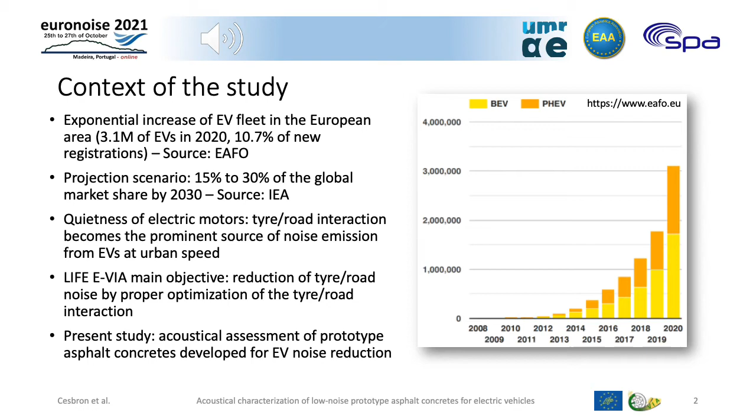Due to the quietness of electric motors, tire road noise is nowadays the prominent source of noise emission from electric vehicles at urban speed. Therefore, the aim of the LIFE E-VIA project is the reduction of tire road noise by proper optimization of tire road interaction. The aim of the present study is the acoustical assessment of prototype asphalt concretes which were developed for electric vehicle noise reduction within the project.

The development of the low-noise asphalt concrete for electric vehicles was divided into three main steps. It followed a holistic optimization which was developed by University of Reggio Calabria. In the first step, up to 150 asphalt concrete mixtures were analyzed by the University of Reggio Calabria, and 9 mixtures were preliminarily designed and tested in laboratory.

Based on these preliminary results, 2 asphalt concrete mixes were selected for prototype construction in France, in Nantes, on a reference test track at Université Gustave Eiffel. Finally, the last step is the construction of a test section in a pilot area in Florence, in Italy, based on the best mixture tested in Nantes.

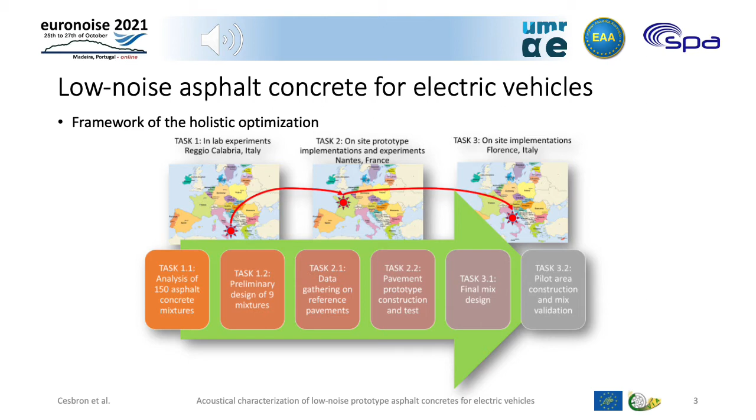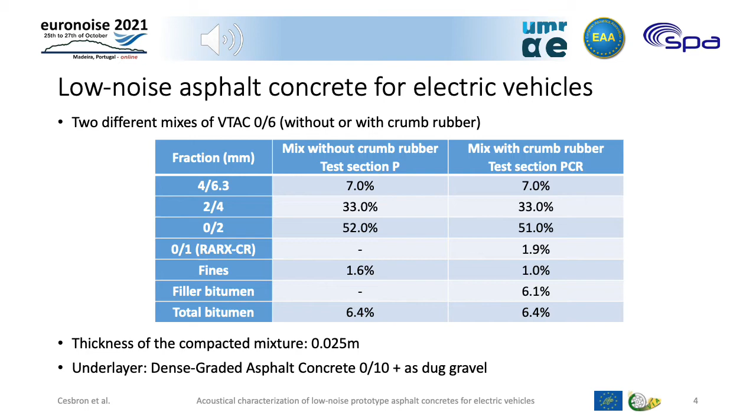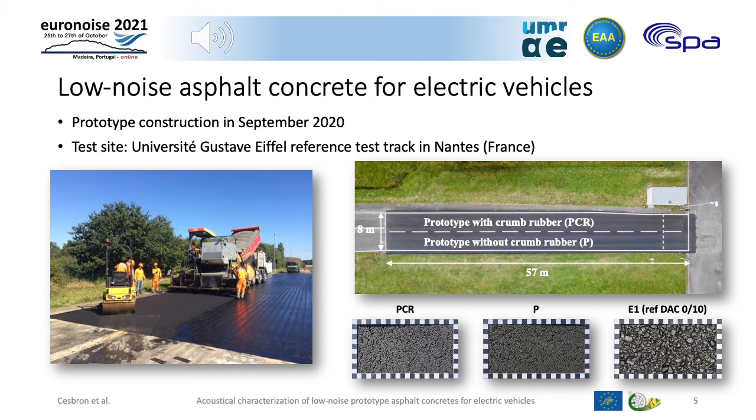At the bottom of the slide you can compare the final state of the road surface for test section PCR and P in a frame of 20 cm by 10 cm. You can compare to test section E1, which is the reference within this study and is a dense asphalt concrete 0/10.

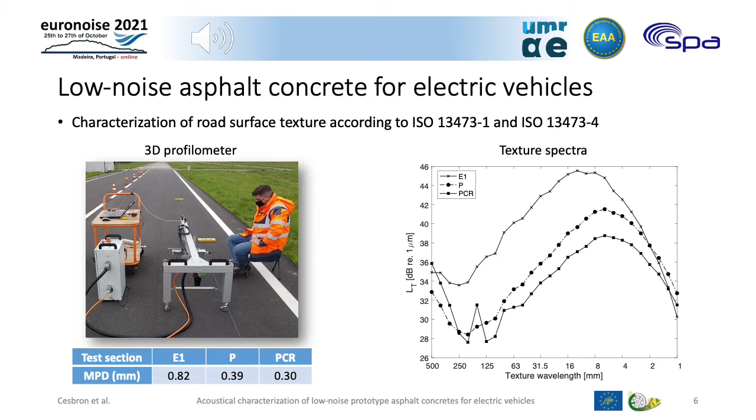On the right hand side of the slide you can see the texture spectra for the 3 test sections. As you can see, the texture levels of section P are up to 3 dB higher than those of section PCR at wavelengths lower than 125 mm, with an opposite situation at wavelengths greater than 250 mm. Texture levels of both prototype test sections are much lower than the reference E1, especially at wavelengths higher than 16 mm, for which a difference of about 6 to 9 dB is observed, respectively, for P and PCR.

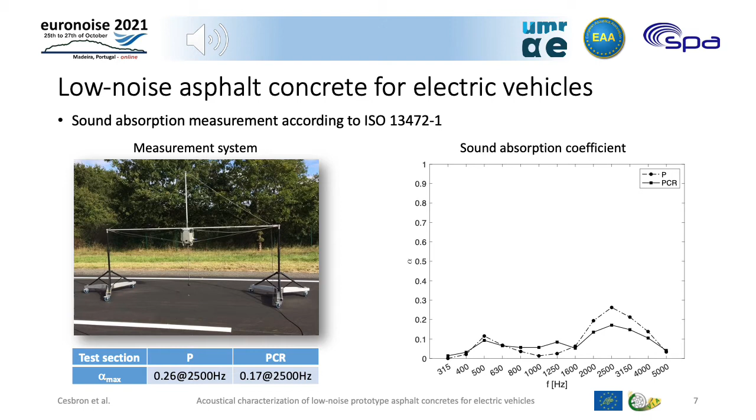The mechanical impedance was also tested on both asphalt concretes. The experimental setup is based on the frequency response function between an impact hammer and an impedance head measuring the direct force and acceleration at the impact spot. On the right hand side of the slide you can see the dynamic stiffness of sections P and PCR in the frequency range between 100 Hz and 2000 Hz. As you can see, the dynamic stiffness is almost constant over this frequency range, thus corresponding to an ideal spring behavior.

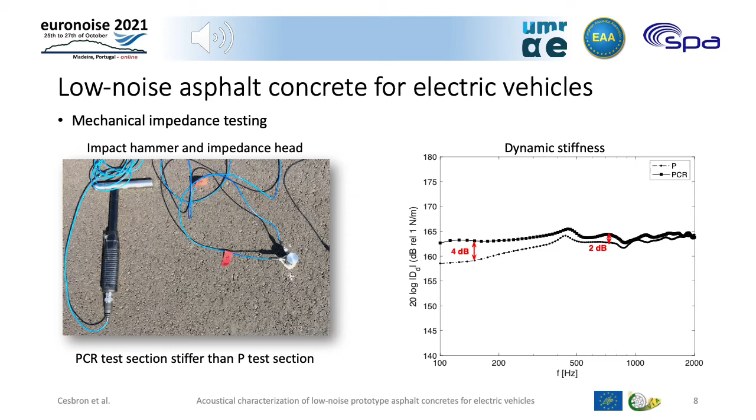Although comprising crumb rubber, it is observed that test section PCR is stiffer than test section P, with a difference up to 4 dB below 400 Hz and about 2 dB above 400 Hz.

Let's turn to the acoustical characterization of the prototype test sections. Firstly, close proximity measurements have been performed according to ISO 11819-2. Two kinds of configuration have been tested. The first configuration was a Renault Scenic fitted with Michelin Energy Saver tires. The second configuration was a Mercedes Vito fitted with SRTT tires conforming to ISO/TS 11819-3.

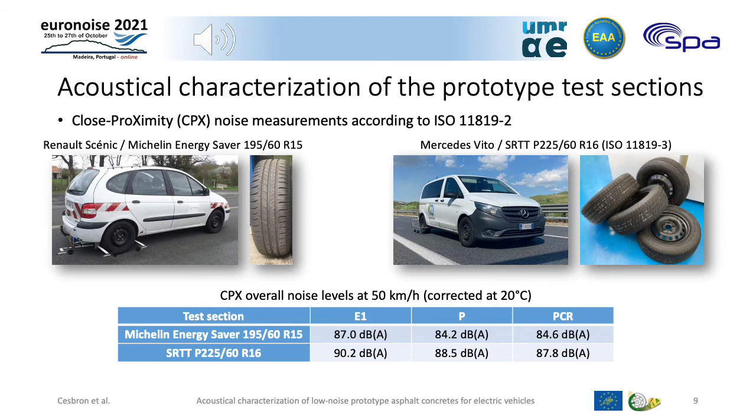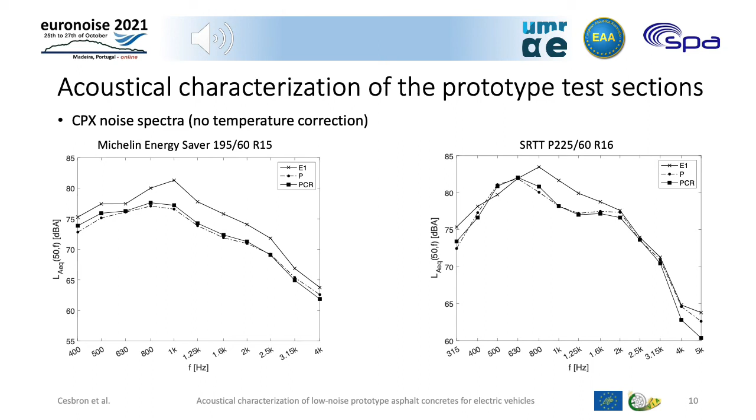By comparison with E1, the highest noise reduction is obtained in the frequency range between 800 Hz and 2000 Hz, with a maximum of about 4 dBA at 1000 Hz. Controlled pass-by noise measurements have also been performed for 2 electric vehicle models. The microphone was located on the left-hand side of the vehicle at 7.5 meters from the middle of the test section and 1.5 meters above the road surface.

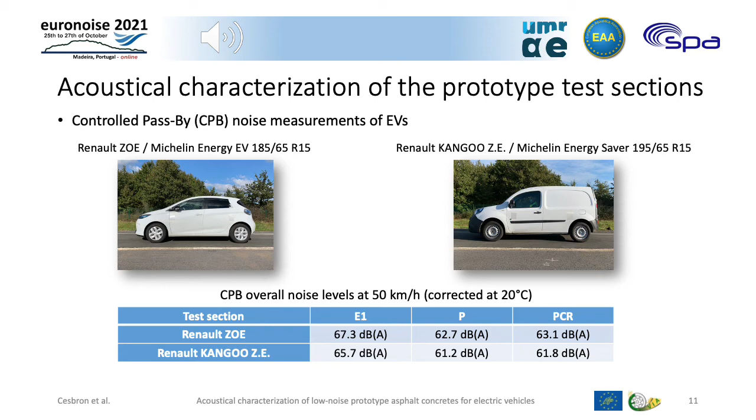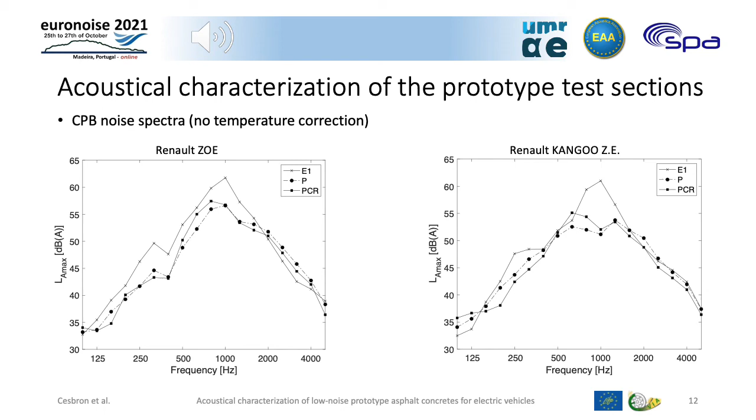Let's turn to the conclusions. In this study, two very thin asphalt concretes 0/6 have been designed and implemented on prototype test sections in the perspective of an increasing share of electric vehicles in the urban area. The very thin asphalt concrete 0/6 test sections P and PCR are based on the same formulation, but PCR contains 1.9% of crumb rubber by weight.

Regarding the surface properties, low MPD and texture levels were observed for both test sections in comparison with the reference dense asphalt concrete 0/10. A very low acoustical absorption was measured on both prototype test sections. Regarding the mechanical impedance, the PCR test section was slightly stiffer than the test section P.

In terms of noise performance, the average CPX noise level reduction at 50 kph on the prototype test sections was 2.6 dBA for the Michelin Energy Saver tires and 2 dBA for the SRTT tires. The average CPB noise level reduction at 50 kph on the prototype test sections was 4.4 dBA for the Renault Zoe and 4.2 dBA for the Renault Kangoo ZE. This noise reduction relative to the dense asphalt concrete 0/10 is very relevant.